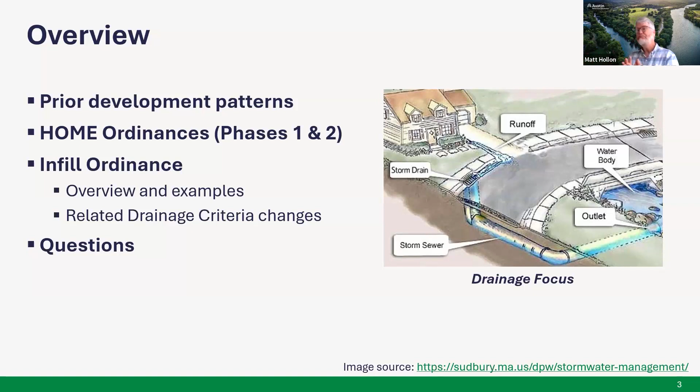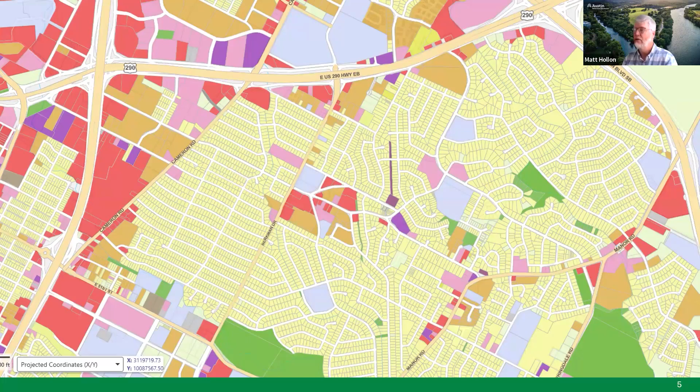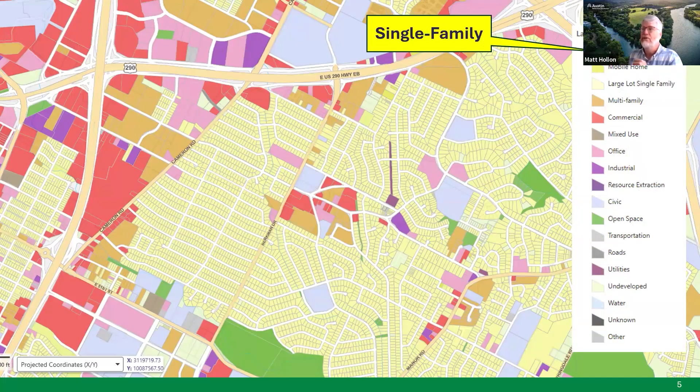I'm going to start with the development patterns we see in Austin. Like many cities in the United States, Austin features land development patterns baked in during the 50s and later, with extensive areas of single family residential housing shown in classic yellow on this map. This is a sample area north of the Mueller redevelopment, probably in Windsor Park. You can also see corridor areas along major highways with a lot of commercial, and that's where a lot of the multifamily is.

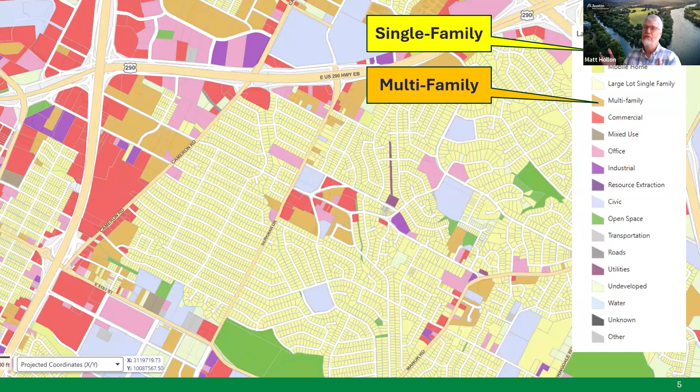The multifamily in Austin, thanks to code changes made back in the early 90s, made it a lot harder to build a threeplex, fourplex, or missing middle small-scale multifamily project, due to a number of factors, some having to do with our land development code itself. They weren't attempting to do this, I don't think, but it basically biased things to make it easier to just build a single house or duplex in these light yellow areas, while building a multifamily project of some scale is relatively straightforward in these large orange rectangles.

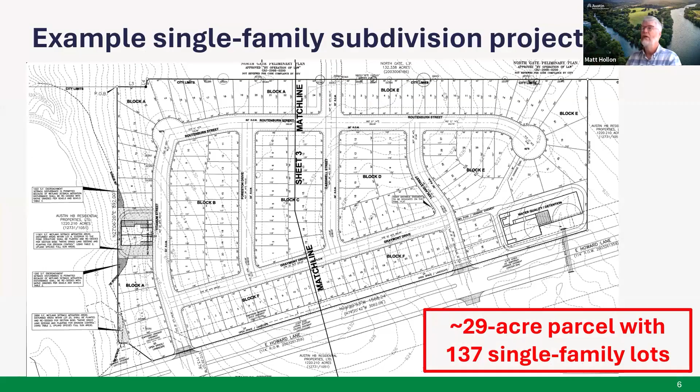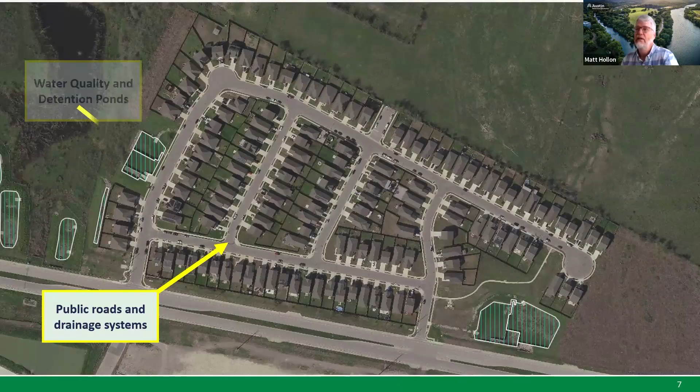Here's a quick glimpse of what these projects look like. Here's an example single family subdivision project, randomly chosen, that went in relatively recently: 137 single family homes on this almost 30-acre land parcel up in North Austin. Here it is in an aerial view, and the key is that when you put a full-blown subdivision with a lot of lots in, you have to build the public roads, the rights of way, and that includes all the drainage pipes, which then drain to water quality and detention ponds. That's the full meal deal of things you need to do when you build a major residential subdivision in Austin - you're going to provide all that infrastructure.

The infill ordinance we're going to talk about is literally for projects that are not building infrastructure like that - they're building much smaller scale. You'll see this wonky number of 17,780 square feet. I can answer in the Q&A why that specific number was chosen, but that was the threshold the council chose in the infill ordinance: if you're less than 17,780 square feet, you don't have to follow the land development code provisions for drainage. You don't have to provide a detention pond, and you don't even have to provide the calculations for it.

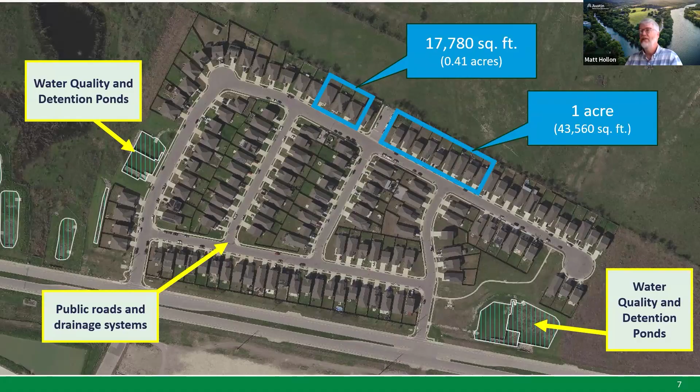So I wanted to show in this bigger subdivision what that scale looks like - in this random sample, it's about 3 homes at that scale. The other threshold we'll talk about is 1 acre. If you're larger than an acre, you won't be able to use the infill ordinance's modified drainage standards, so you have to do the standard full-blown drainage analysis if you're above an acre. I wanted to show you what that looks like - I think it's about 8 or 9 lots in this case, though it could be different depending on your situation.

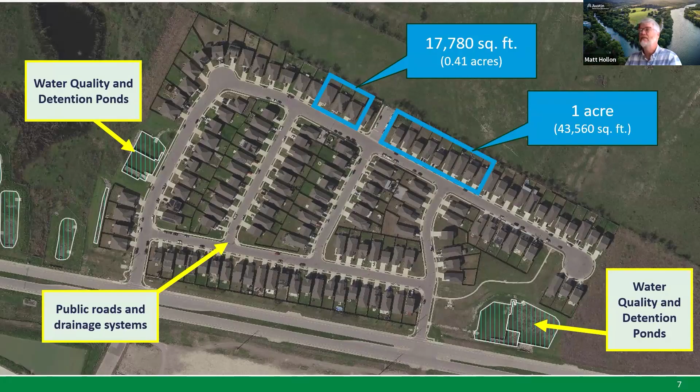On the multifamily side, we're seeing a lot of these Texas wrap, Texas donut projects around town. They're fantastic at providing housing along corridors - there's a parking garage in the interior, and it's wrapped with housing. This has provided a lot more housing in Austin.

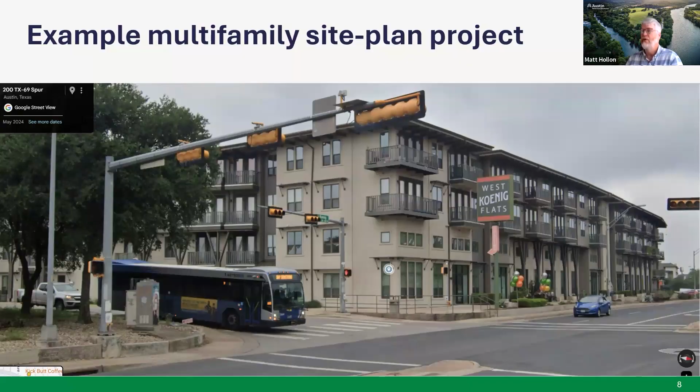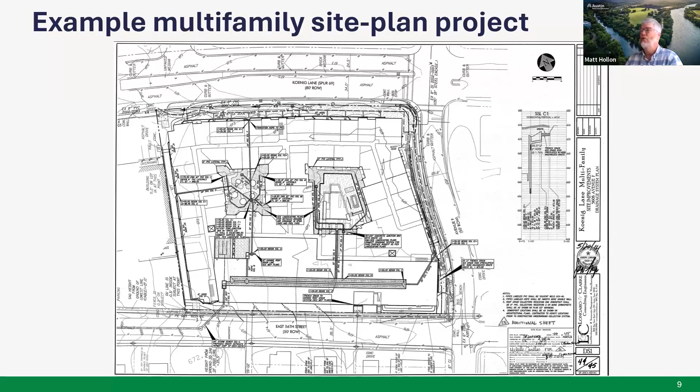So this is a significant scale. This is a 2 and a third acre parcel. It's got 210 units, and here this is the site plan for it, showing the drainage components.

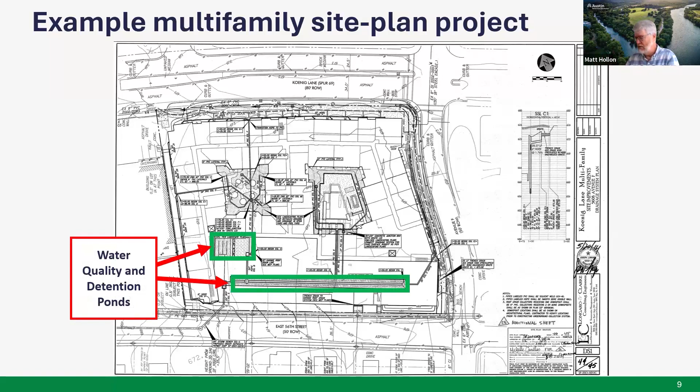So you've got 200 units, and more extensive infrastructure put in on the drainage side.

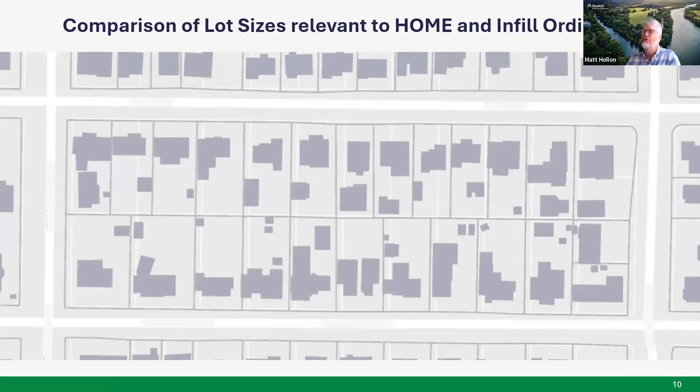I'm going to show you this slide later on again, but just for a quick overview, this is going to show you an example from Central Austin. I think this is Brentwood neighborhood, but it doesn't matter. There are many that look a lot like this same scale. These lots are actually slightly larger than some other areas of town, but they're not huge.

In fact, just for scale, this is 150-foot deep lots. And a lot of you guys remember in the Home 1 and Home 2 conversations, we talked a lot about the number 5750. That was the old number of the minimum lot size in Austin.

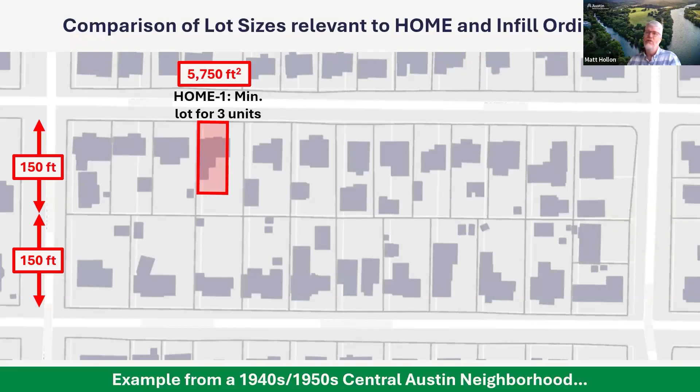And now it still has relevance. If your lot is not 5750 square feet or greater, you cannot build more than one unit on your property, but you can actually go smaller than 5750 at this time. You can see in this particular neighborhood that's a little smaller than the lots that were going in.

I think I may have gotten this number from Lindy at one point, and the planners over in the planning department, but the average citywide lot is around 9,000 square feet. So this just shows you what a lot of these lots look like in this particular neighborhood.

And then there's that magical 17,780 number again, and it shows up. You can see it's kind of crossing this lot line here. This is just superimposed - the red square - this lot is not 17,780.

And that actually derives from the fact that our water quality code says that if you have less than 8,000 square feet of impervious cover on your lot, you do not have to provide water quality control for your land development. So if you do the math on it and ratio it from 45% impervious cover max for these residential subdivisions with this particular type of zoning, you get a lot that's about 17,780 square feet in size. Anything less than that's not going to have water quality control.

We're actually talking about drainage here, which is slightly different - detention ponds and other drainage aspects. You wouldn't need that either, so we basically chose those numbers to be the same. If you're not going to have water quality needs, you wouldn't have a water quality pond, and in this case, in a little while we'll talk about the infill ordinance, allowing you to not have, or even to look into whether you need, a detention pond.

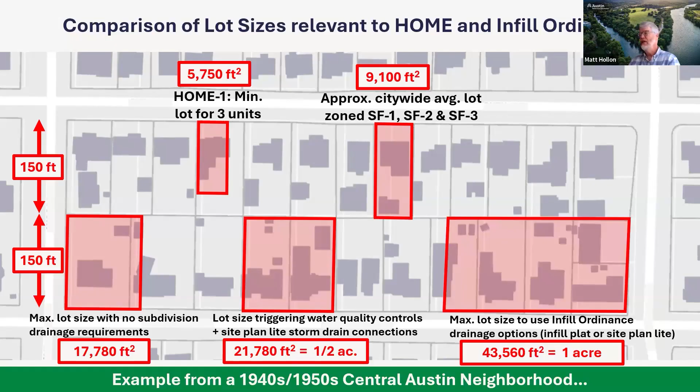Another number you'll see pop up in this presentation is a half an acre - 21,780 square feet. This is more relevant to site plan lite, small scale missing middle multifamily. And then finally, there's the 1 acre size. You can see, at least in this particular neighborhood, that's 4 or 5 lots in size.

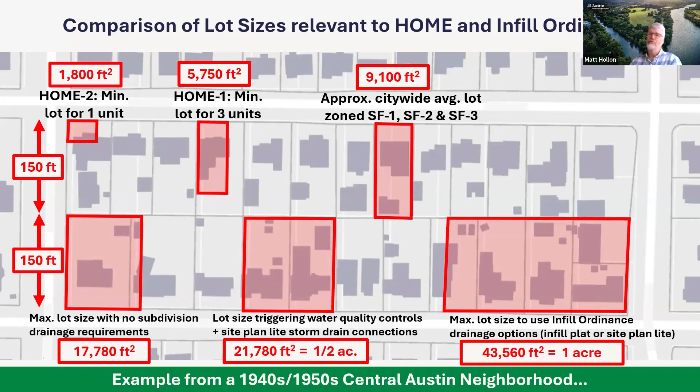Anyway, I'll go back through this again in a little while, but I wanted you guys to see the scale. If you're redeveloping or re-subdividing one of these lots, you're not providing the streets, the drainage, and so forth - although with a site plan light project, you would potentially have a drainage connection in the public right of way. And then here's that 1,800 square foot minimum lot size that was approved by council with Home 2, just for scale.

All right, so I'm going to briefly go through Home 1 and Home 2. They're a little bit different. This slide - again, Bianca will send it out to everybody so you have this information - I'm not going to go through each line item on all of these.

But basically, council is saying, look, we want more options. We don't want to just have single family and duplex only, with large scale multifamily, and that's it. How do we have smaller, more diverse housing types? So they passed this ordinance. Phase 1 passed in December of '23, and then phase 2 shortly after in May of 2024 passed. I'll just go through it.

For Home, it's just looking at zoning types of SF1, SF2, and SF3. If you're SF4A, for instance, it doesn't apply, and you'll see there's a lot of lots out there that have this zoning designation. So basically, Home 1 just says, look, in the old days, you could either have only one unit per lot if you had SF1 or SF2 zoning, and if you had SF3 zoning, you could have an ADU or second unit, et cetera, duplex.

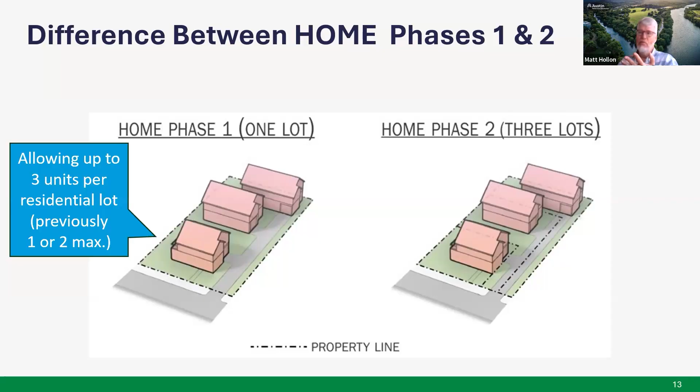But HOME one clarifies or updates it so that on any of these 150-something thousand lots, you could potentially build up to 3 units. On phase two, it takes that same concept and says, wait a minute, we don't necessarily want to have folks either own the entire thing themselves or condo-ize it. Let's make it so you can more easily subdivide it.

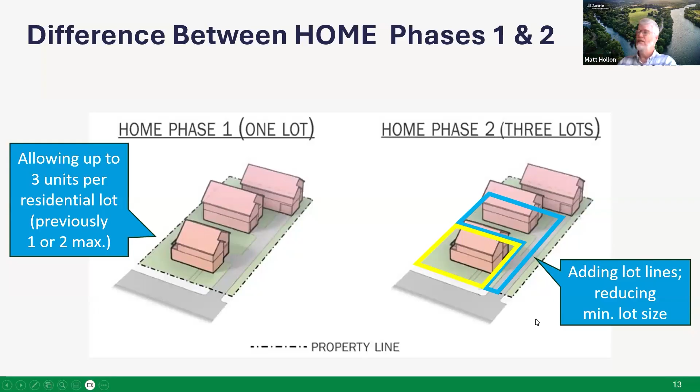You could subdivide it before HOME one and two, but the lot sizes are probably going to block you in certain cases, and the process of providing detention would be a barrier for a lot of these, because at the time of the phase two HOME, there was no clarification that below 17,780 square feet you don't have to have flood detention. So this project you see on screen, the cartoon, would have to go through the exercise in our code of seeing whether or not you need detention. That's a super small scale and probably not appropriate, and that's what the infill ordinance was all about.

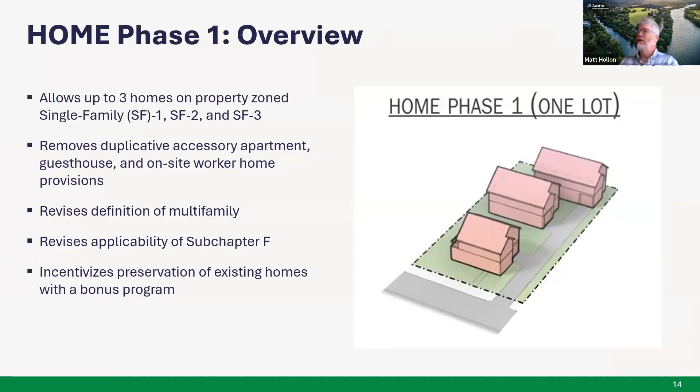Quick overview of HOME one itself, allowing up to 3 units. It has some other information here. I'm glad to go back through this if people have more questions about HOME one or HOME two, but I don't want to spend too much time because I want to make sure we have plenty of time to talk about the infill ordinance. But you'll have these as a resource, and I'm happy to return to any of these slides. Each slide has a number at the bottom, so we can always return to those.

On HOME one, on the land uses, you can see the kind of projects that are going to go in there. Again, SF1, SF2, SF3 only, 2-unit duplex and 3-unit residential. You can use all of those things, and you can look at this map and see how extensive these lots are scattered across the city. There are over 150,000 single family SF1, SF2, SF3 lots.

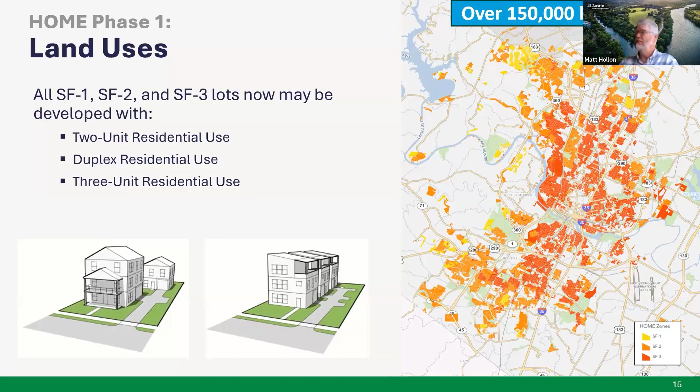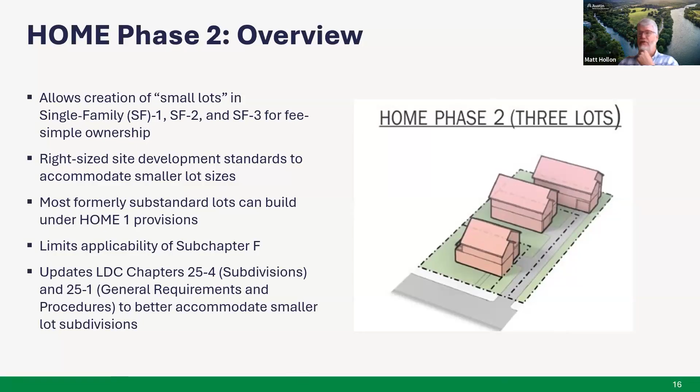All right, let's go to HOME two, and that's where we're subdividing. The idea was that somebody doesn't have to own the entire larger lot to own a property and a home in Austin, and to make the process a little more straightforward than some folks are concerned about with the condoization process. There's more information here—this is excellent stuff from Lindy—and I'll leave it for more discussion later if folks have more specific questions about this.

Basically, HOME two says if you're less than 5,750 square feet but more than 1,800 square feet, you can make a lot that small, and it will only have 1 unit on it. If it's larger than 5,750, then you can potentially put up to 3 units on those lots.

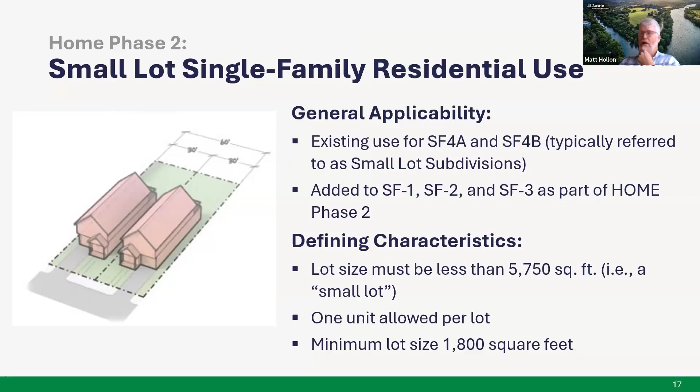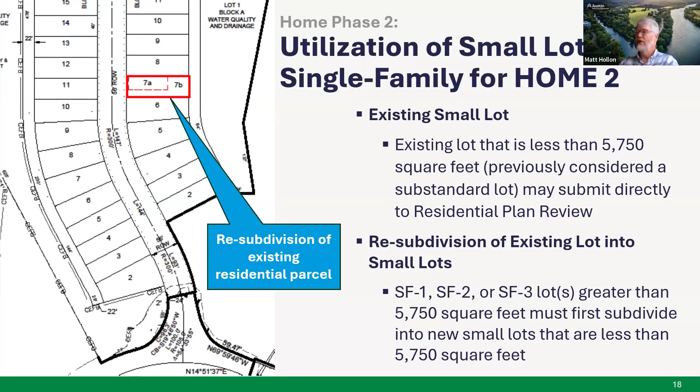Subdivision is a big part of the infill ordinance, so what we were trying to do with HOME two is allow people to have smaller lots actually subdivided, not necessarily just from some sort of condo regime with no subdivision or delineation at all. So that's where the infill ordinance really helps.

All right, here we are, the infill ordinance. The precursor to the infill ordinance was an ordinance that didn't have as much fanfare, referred to as Site Plan Light Part 1—very affectionately, very memorable. Basically, Site Plan Light refers to the site plan process where a multifamily project would be designed and submitted by the applicant to our review staff through the site plan process. Well, the site plan process was really designed, as you saw in the early work, for those big subdivisions, the big multifamily—so there are quite a few steps to take.

We actually had some of our stakeholders come forward and say, look, you only have to do 5 or 6 things if you do a building permit, but then if you go to a site plan or a subdivision, you've got to do many more, and it's a lot more expensive and takes a lot more time. Council was sympathetic to that, and they said, look, we really do want these 3-plexes and 4-plexes, and we also want 5 to 16 unit projects—and that's going to be the infill ordinance focus.

But just to kind of get the ball rolling, they said, look, if you're 3 or 4 units in size, just do the same process as you would do for the residential plan review if you're building a single home or a duplex or 2 unit project. So that has already gone through and is in place.

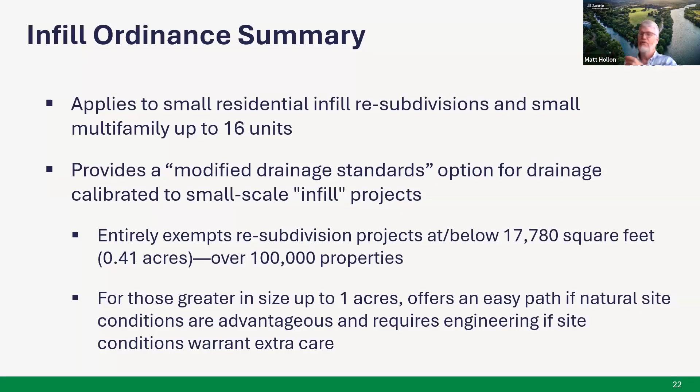Mother Nature is still out there, landforms are still out there, topography is still out there. So if you have a site that's really challenging and drains to your neighbors, we wanted you to still pay attention to those things, because that scale is large enough that you want to make sure that things go well. So we have kind of a three tiered process.

So here it is, a quick handy summary table. Thank you, Lindy. This shows these two basic types. There's the re-subdivision and there's the site plan. We break it out within the re-subs, less than 17,780. No drainage requirements, so you're off the hook. There's no drainage requirements for you from this section of our land development code.

Does that mean you don't care about drainage and you just build your project? No, you're going to want to make sure that your house has adequate freeboard from flooding and all the other things you want to do with elevation, and you want to make sure that the drainage comes off your site and doesn't harm your neighbors. There's state law that says you have to do that, and you could actually get sued if you don't do a good job of that. So you want to make sure that goes well.

But we, the city, have made the decision through this process, and council passed this, saying that we're not going to hold you to these drainage requirements that have all the detailed engineering and detention and so forth. All right, so if you are a re-subdivision greater than 17,780 and up to an acre, then you have this following three-tiered process, and the same thing goes with any site plan like project all the way up to 1 acre, no matter how small.

So if you have really straightforward topography and your drainage is just going to literally fall down into the streets around you, the rights of way around you, or a public storm drainage system like a creek or a drainage way itself, then you're not going to have to.

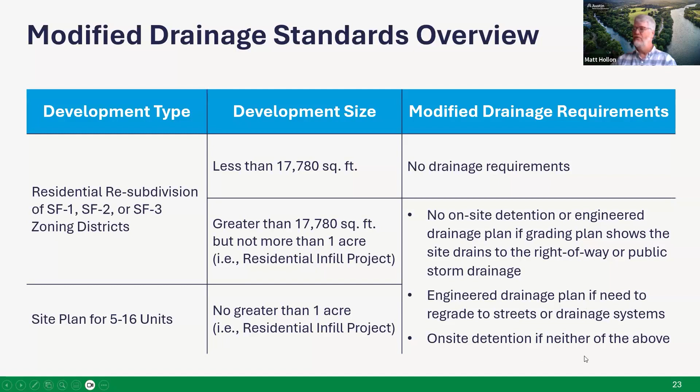So straightforward drainage, no problem. A very simplified version that doesn't have the same level of technical expertise needed. And then if you need to regrade your drainage on your site, then you are going to have to use some form of engineered drainage. You won't have to do a detention pond, but you will need to regrade. You'll need to use a more careful engineered design. And then finally, for the most challenging sites, and frankly, the ones that would cause the most drainage distress to their neighbors, you're going to continue to have to use on-site detention.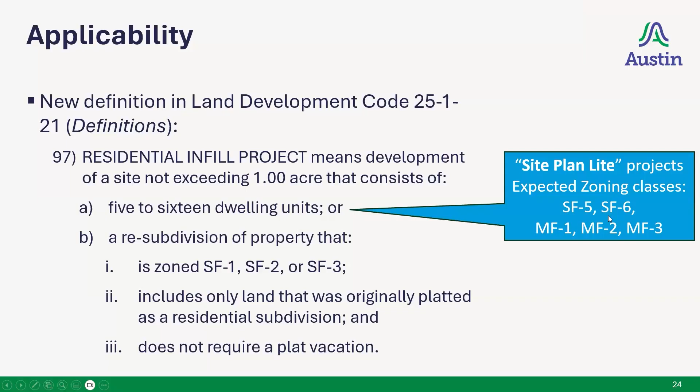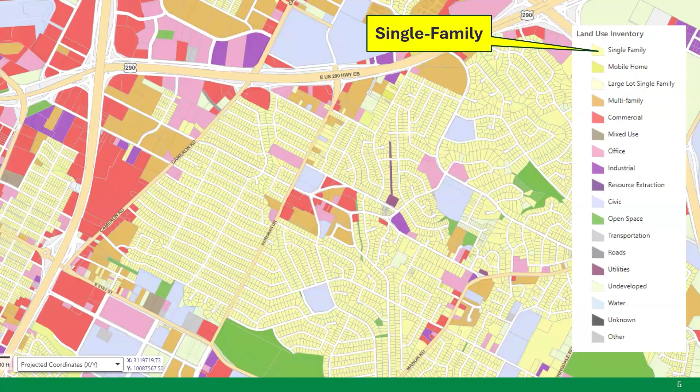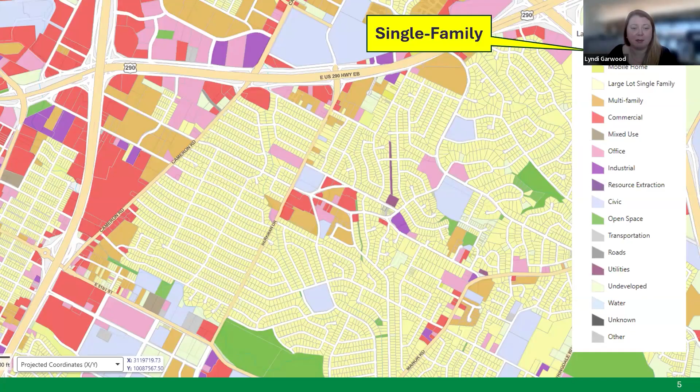SF. Hey, looks like we have some technical difficulties. Please stand by. All right, y'all. Thanks for your patience as we continue on. We haven't gotten a hold of Matt, so we'll continue with the presentation. Matt will join us once he's able to get back on. Appreciate y'all's patience. Okay. Can everyone see my screen? Yep, yes, that's good. Excellent. So I was not prepared to necessarily do the presentation, but I'm familiar with the content. And so since Matt's not available, I'm going to go ahead and do the presentation as I know it and ad lib and wing it a little bit. So please forgive me if I'm stumbling a little bit as I go through the slides. Hopefully Matt will join and he'll take back over. But in the meantime, I don't want to leave everyone just waiting. And then if you have questions, feel free to put them in the question box. Yeah. Why don't you go ahead and continue?

Okay. I'll just start with applicability. So a new definition was added to our definition section of the Land Development Code, and it's for residential infill project, which has kind of two different designations. Both of them cannot exceed an acre in size, but the first one is A, 5 to 16 dwelling units, and that is really geared towards Site Plan Lite or the missing middle multifamily size projects. And then the second type of infill project are re-subdivisions of property that's zoned SF1, SF2, SF3, includes only land that was originally platted as a residential subdivision and does not require a plat vacation.

So basically what this means is that it's a property that has already been platted as a single family residential. It's going to be continued as a single family residential, whether it has 1, 2, or 3 units. All of that is considered single family residential. And you're just replatting the lines of that existing subdivision to have smaller parcels. So you might have an existing 5750 tract that has 3 units on it, and you want to divide that into smaller tracts so that they're fee simple units, where each unit is on its own individual lot, but the original plat was already residential.

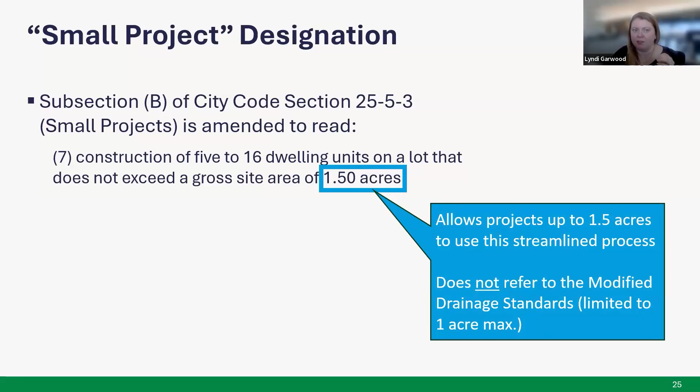For the small projects, it's for a project that doesn't exceed 1.5 acres. And so you can be a little bit bigger project and still take advantage of this small project designation, even though you may not get the same exact benefits of being a residential infill project, you still get to be considered a small project. Yeah, so this does not refer to the drainage standards, which are limited to that 1 acre, but instead allows for a little bit larger projects with 5 to 16 units, but on larger land tracts to be small projects.

Okay, so what the infill ordinance does and does not do. It really focuses on preventing lot to lot flooding. So it's not really talking about local or creek flooding, or it's not really addressing large scale flooding changes. It's really trying to address the effects of what your drainage on your lot might do to a neighboring lot.

And so that's why, as Matt was previously talking about, if your lot naturally drains to the street, you qualify. But if your lot drains to your neighbors, you might have to do some grading. And if you can't do the grading, you might not be able to use this program. That's why, because it's really focused on that lot to lot. Can you change your topography to go to the street? Do you naturally go to the street? And if not, then it's not addressing that lot to lot flooding.

It doesn't allow an increase in impervious cover. It doesn't change what the impervious cover regulations are. All of that remains the same based on what your underlying zoning district is. But it's really about how it drains, not necessarily how the water infiltrates into the ground.

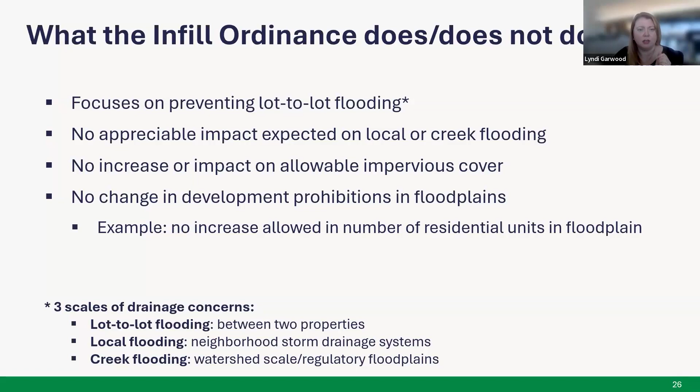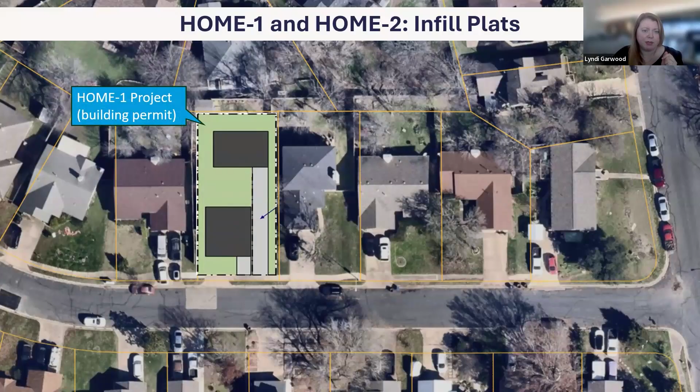Let's see. Okay, so this is an example of a Home One project where previously there was a single house. The Home One project used a building permit and built 2 individual houses on 1 lot. This is an example of a Home Two project. It's the same single family house that was redeveloped into 2 different houses. The difference is there is a lot line between the houses, and these are what's called fee simple. So this house is on one lot and this house is on the other.

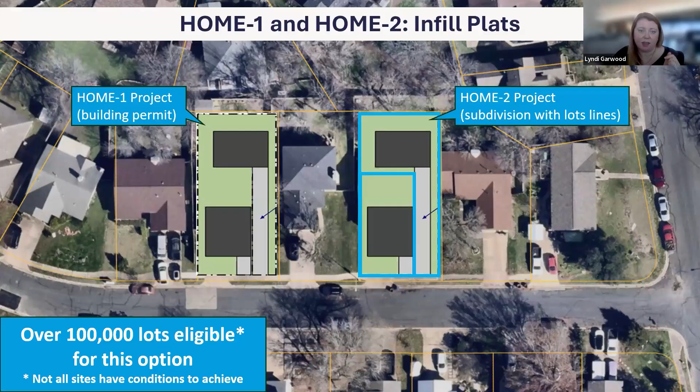This requires a subdivision because this is under 17,000 square feet. It qualifies for the infill plat regulations, and it would not be required to do drainage because it falls under that minimum size threshold, because this is an average lot size here in Austin. And then there are over 100,000 lots that are eligible for this throughout the city, which is great.

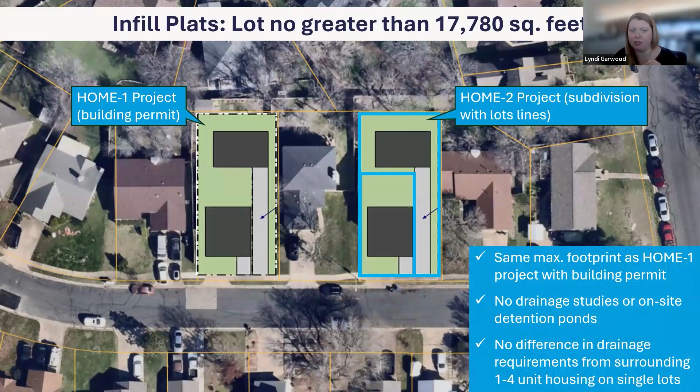This is what I was previously discussing, where the home is on individual lots. There's no difference in drainage requirements for the building permit or the subdivision because it's the same footprint. So no drainage study or on-site detention is required, as long as the lot is less than 17,780 square feet.

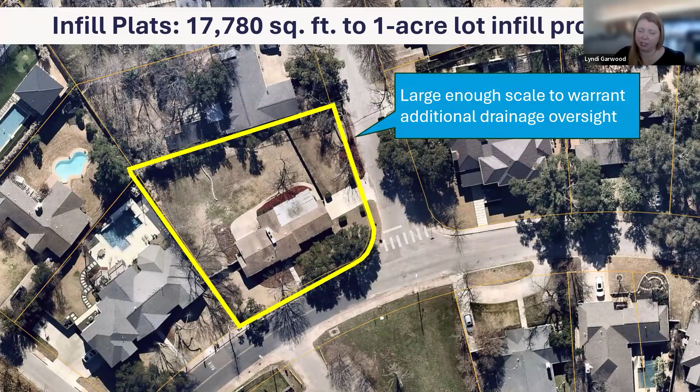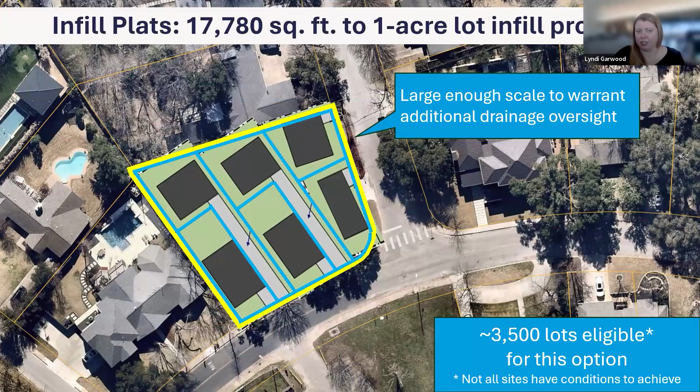Now for lots greater than 17,780 square feet up to 1 acre, the scale is large enough that you need to look at the drainage. That's when we start looking at which way the grading sends the drainage—to the street or to your neighbor—and whether you can regrade the project. In this example, there's about 3,500 lots that fall within this size range, and it would depend on how the drainage looked as to whether you can use the infill ordinance.

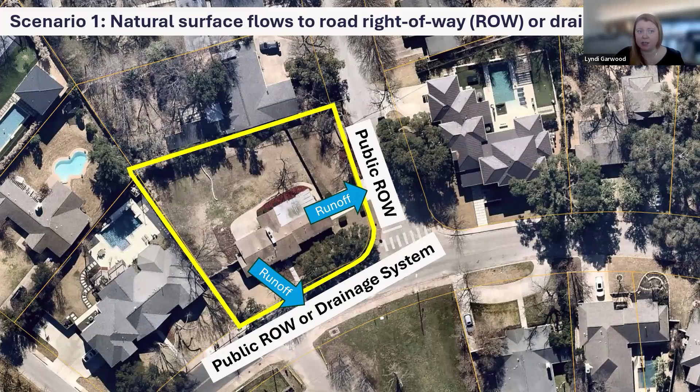In this particular example, the runoff comes from this street or from this portion of the lot to the public right of way, meaning it naturally flows there. That means you'd just have a simple drainage plan showing existing conditions, proposed conditions, and a building permit—you would not need the engineering report, a detention pond, or RSMP.

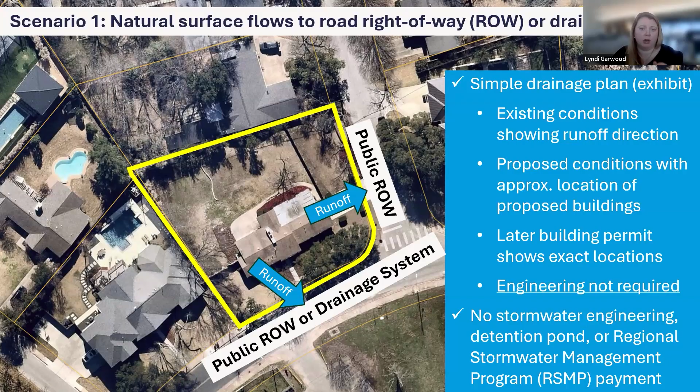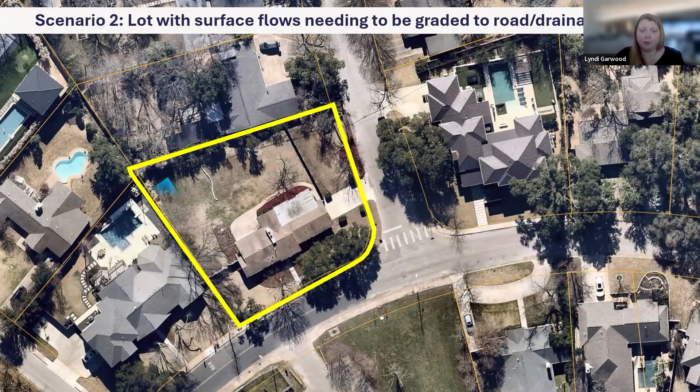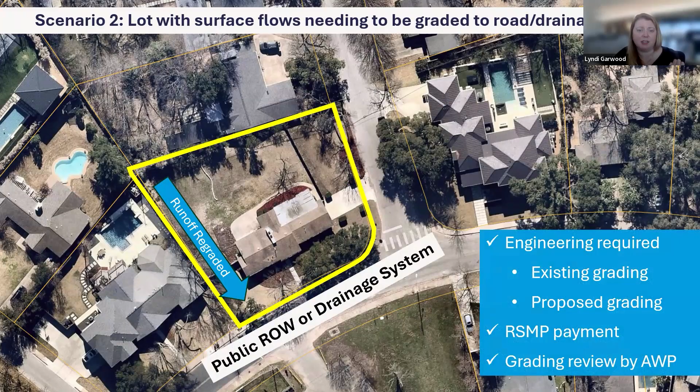Now, if you have a lot that needs to be graded to the road, but it actually drains to the neighbors, you need to regrade your property so the runoff actually runs to the public right of way. You would regrade your property and then have to show existing and proposed grading, with engineering and RSMP, with the grading reviewed by Austin Watershed Protection.

Oh sorry, that is a change—the RSMP payment goes away, I apologize. So then you just have the existing grading and proposed grading, and the grading is reviewed by Development Services. So yes, that's a change—the RSMP payment goes away.

And I just saw that Matt returned. So if you're ready, Matt, I'm happy to give it back to you. Thank you everyone for the patience as I worked through these slides in real time. I appreciate everyone's patience. All right, I owe Lyndi big time here. I have no idea where I ended. I successfully gave the speech to myself, apparently. So I am in your debt, guys—everybody out in TV land as well.

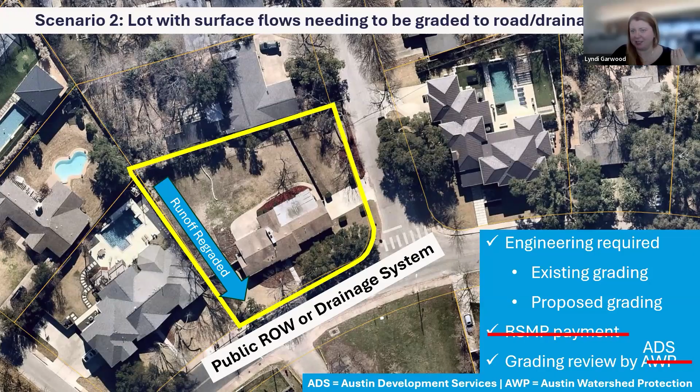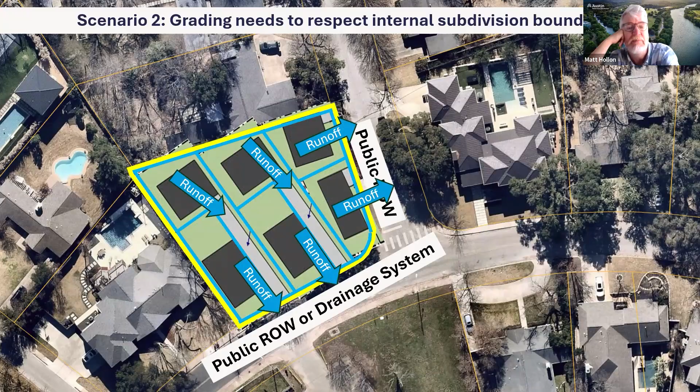This was just showing that you have to pay attention to lot lines when you create the new internal lot lines—you can't just blow past them and have water going across lot lines into other people's homes and lots. You'll probably need to route the water through the flags on the flag lots and maybe add drainage easements across what already have joint access easements on these driveways. So you're creating a small subdivision with drainage that needs to respect the property boundaries, which complicates things a bit, but it's an important part of the process.

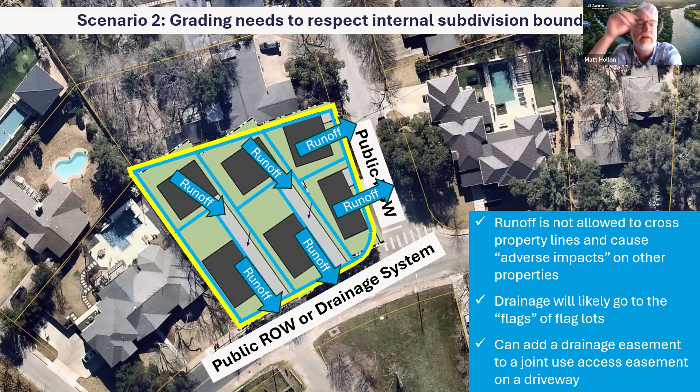All right, this is the least favorable scenario—draining to a neighbor. This is where you want to prevent water from creating drainage problems on your neighbors, at this scale—17,780 square feet up to 1 acre for resubs, and pretty much anything up to 1 acre for site plan lite multifamily. We don't want this scenario to be undetained or uncontrolled, so you'd have engineering required for that and the site plan exemption.

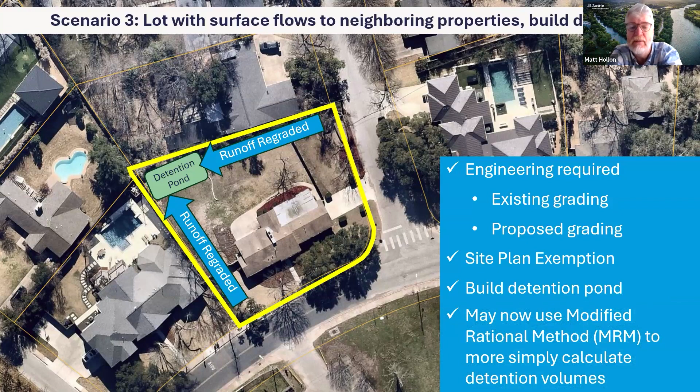And you'll see that we actually, with stakeholder input, are offering the modified rational method to calculate detention volumes. Okay, let's go to the next one.

Just showing the same thing for the case of multifamily—you have the same 3-step process. Since the impervious coverage is a little higher, there's more concentrated runoff, so we're not offering that 17,780 exemption below that. Let's go to the next slide.

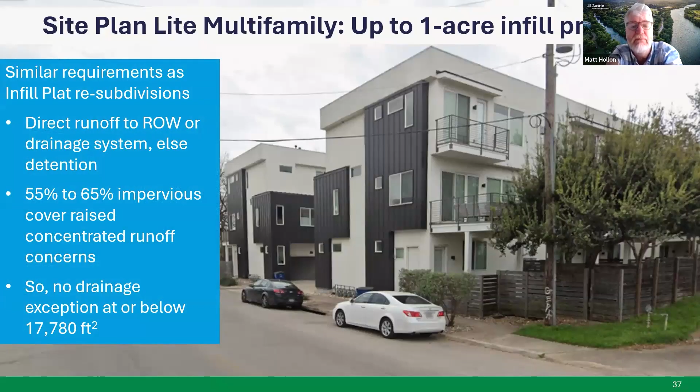Let's go to the next slide. Click through about 5 or 6 times until we get to the 1 acre site. I'm going to focus on this for the storm drain connections. Right now, we heard from stakeholders it was a big deal that you might have to connect all the way to 550 feet away.

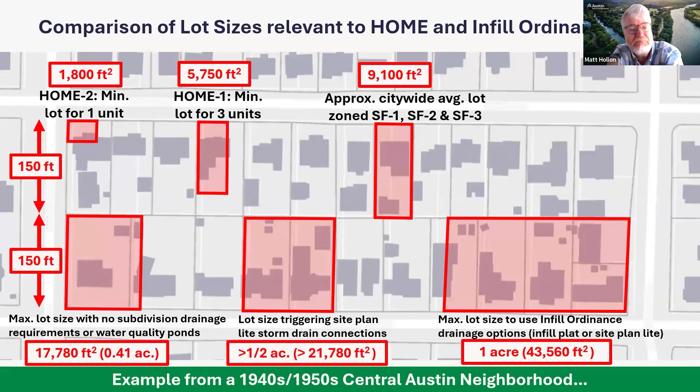And there's the site plan lite project, for example, and these are all the other ones we're assuming are re-subdivisions. The old rule was that any scale of project—site plan, resub, or subdivision—you'd have to connect all the way up to 550 feet away. That could be a $500,000 or more project, and for this scale it was recognized that's probably not proportionate, not required.

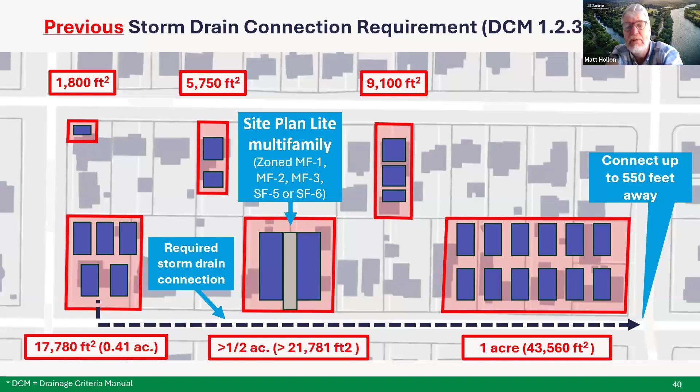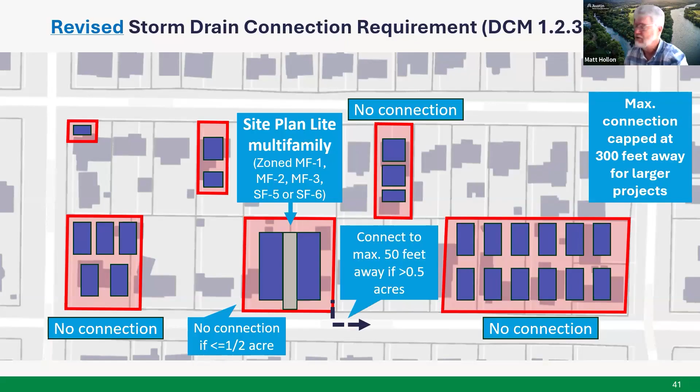So we capped the maximum connection at 300 feet for larger projects. We made it so there's no connection at all required for re-subdivisions up to 1 acre, those residential infill sites. And if it's less than a half acre site plan lite multifamily, also no connection. You'll see you only have to connect up to 50 feet away, which effectively means you need to connect only if there's a pipe in front of your project.

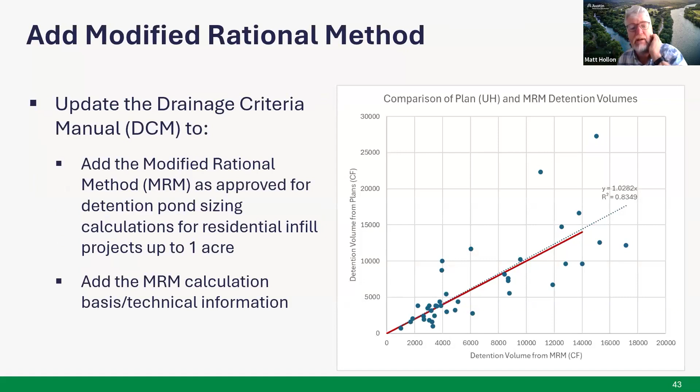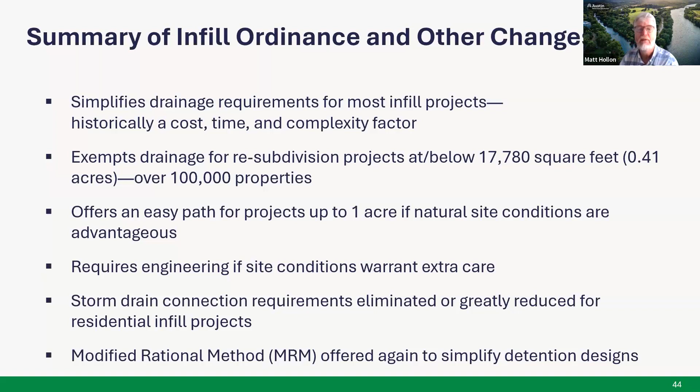My apologies, I can't believe I went—not sure what happened to my system, but I'm sorry to put Lindy through that. I appreciate your subbing in for me greatly.